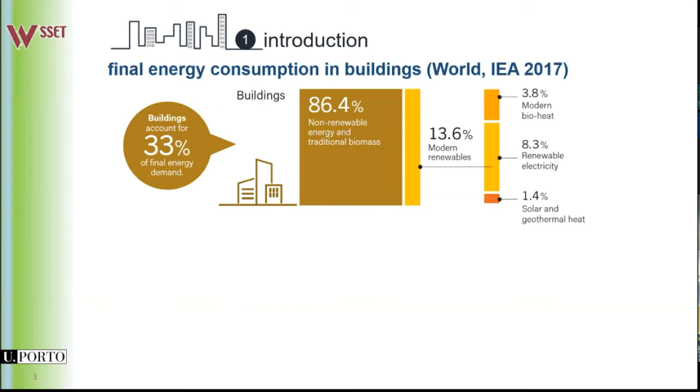As it is well known, buildings are responsible for about 33% of the final energy consumption in the world. And of those 33%, a very large portion is met by non-renewable and traditional non-renewable energy, like fossil fuels, and also traditional biomass. Only 13.6% are met by modern renewables, which include bioheat, renewable electricity, solar, and geothermal heat. We can discuss if traditional biomass may or may not be considered as a renewable source, but that is another question. Of course, part of traditional biomass is renewable, but not 100%.

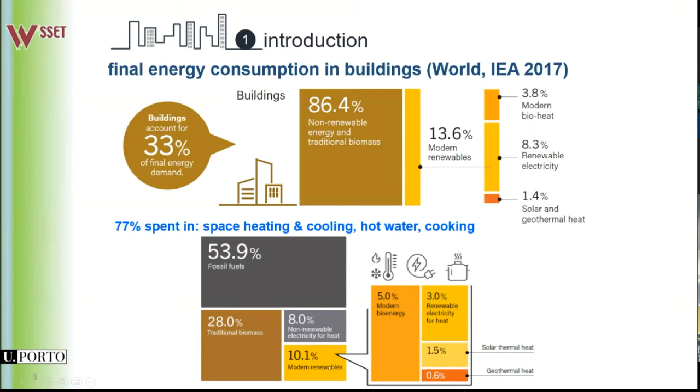Of all the energy spent in buildings, 77% is spent for heating. That means space heating and cooling, generating hot water, and cooking. And more than half of this is met by fossil fuels, 53.9%. Only 10% is met by renewables and modern renewables.

When speaking about energy savings and using the designation of zero energy buildings, we may ask this question: is zero energy possible? Well, there was a famous railway engineer in the UK, Brunel, who said that nothing is impossible when you are an engineer. So assuming we are engineers, what would be the strategy to follow to achieve zero energy in buildings?

The first approach is related to the reduction of energy needs. We can reduce the needs of energy by not spending so much, or as an extreme situation, by not having any people in the building. Of course, this is not an option because buildings are made for people. But if you remember, some of the first measures to lead to energy savings were related to changing set points, reducing the set point of ambient temperature when people were not in the buildings, and so on. So the first part of the strategy to achieve zero energy is to reduce the energy needs.

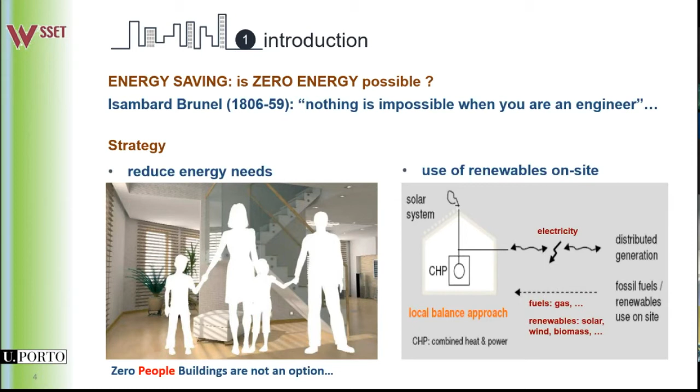Then we can also use renewable sources of energy on site. This means using solar energy systems, wind energy, biomass systems that are able to meet the demand of energy. We will look at the building as an energy system which exchanges energy fluxes with the surroundings. So it will receive energy from the outside, it will receive electricity from the grid, it will eventually deliver some electricity to the grid if we produce electricity on site, for instance with a solar PV system, and we will take into account all these energy fluxes to achieve a zero balance. I will talk in a few moments about this definition of zero balance.

So, looking again at the possibility of achieving zero energy, there are some studies that led to a conclusion that that is not possible in every building. There are a few questions, namely the available space to install solar energy systems, for instance. And this graph I'm presenting is showing, let me point out, this is the number of floors in the building, and this is the percentage of buildings that are able to meet the zero energy standard. And as you can see, if you have one story, it's much easier to achieve zero energy than if you have 3 or 4 stories, for instance. This is the result of a study made in the USA.

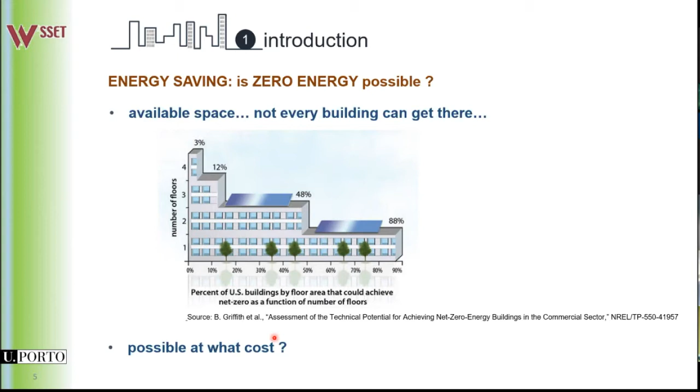Another issue, besides the available space, is the cost of obtaining zero energy. So it may be possible, but it may cost too much. And that is another issue I will try to address.

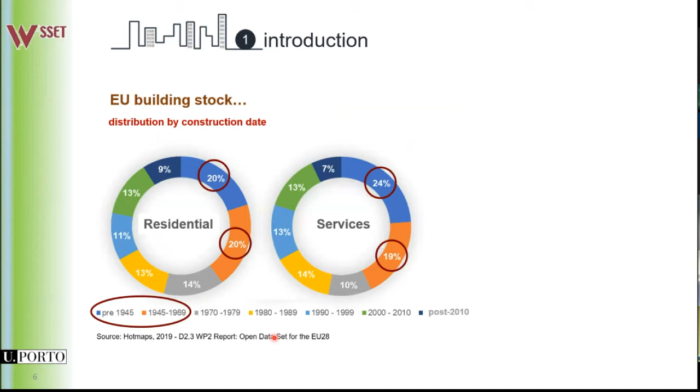Another important aspect is that if we look at the European Union building stock, we find that most of the buildings are quite old. In fact, a large part of them, either residential or services buildings, more than 40%, are more than 50 years old. And many of those buildings were built before energy regulations were in place. And this means that the standards are not meeting the zero energy requirements. So there is a huge potential for energy saving in those buildings if we look at the renovation of the buildings.

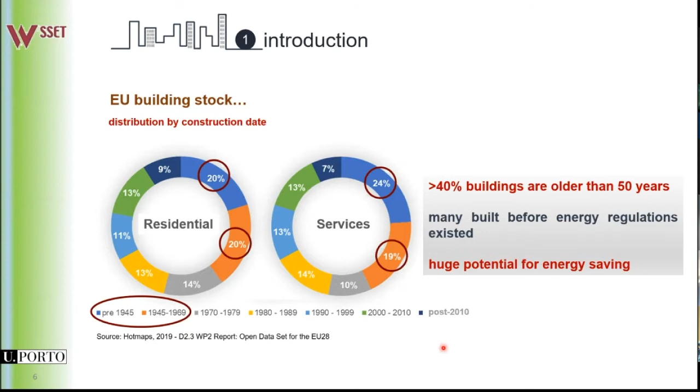Now looking a little bit at the regulations and definitions of zero energy buildings, there is a difference between a zero energy building and what we call NZEB, a nearly zero energy building. A zero energy building is seen as a net zero energy building. This means that if we make a balance between the energy exchanged with the outside, taking into account the energy we may produce in the building and the energy needs we actually consume, a net zero energy building has a zero energy balance over the period of one year. So energy needs are equal to the energy produced to satisfy those needs.

Another concept is nearly zero energy buildings, introduced recently in the last 10 years by the European Commission. This means we do not have a zero balance. In a nearly zero energy building, or NZEB, we have a consumption which is slightly higher than production. Of course, the term slightly is very vague. We do not know exactly what is slightly. It can be 1% higher or it can be 10% higher, and this is a question I will address.

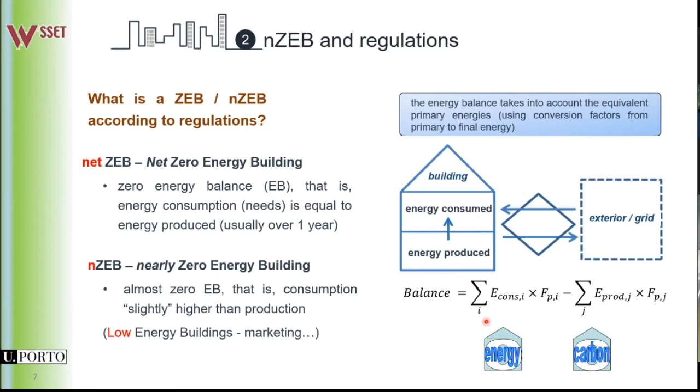To complicate the definitions a bit, there is also the definition of zero carbon buildings, or nearly zero carbon buildings. I will concentrate in this presentation on zero energy, not zero carbon, but a similar approach could be followed. Zero carbon is used in many regulations, for instance in the UK for residential buildings and in other countries, but the European Union is focusing on zero energy rather than zero carbon.

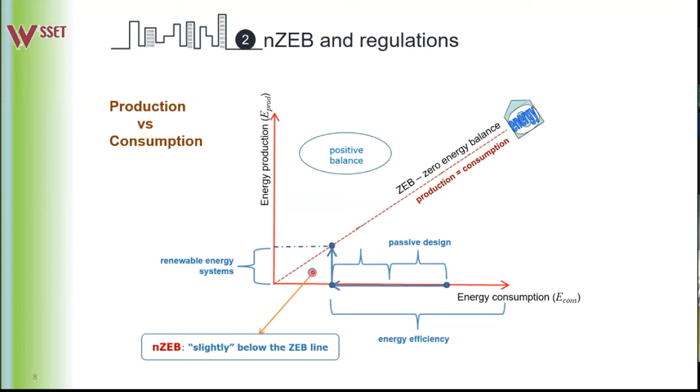Looking now at the existing regulations, in particular the European Union regulations, their evolution and the present situation. In the beginning of the century, we started with the first directive, called the Energy Performance of Buildings Directive, in 2002, which established the process of energy certification in buildings. After that, the member countries all applied this directive with different variations, and we have had an energy certification process going on as usual since then.

Let me just drink a little bit.

We started hearing and talking about zero energy buildings back in 2010 with the recast of this directive, often called EPBD2, where the objective was to achieve, in a number of years, the zero energy building standard, or a situation close to zero energy. Nearly zero energy was then defined.

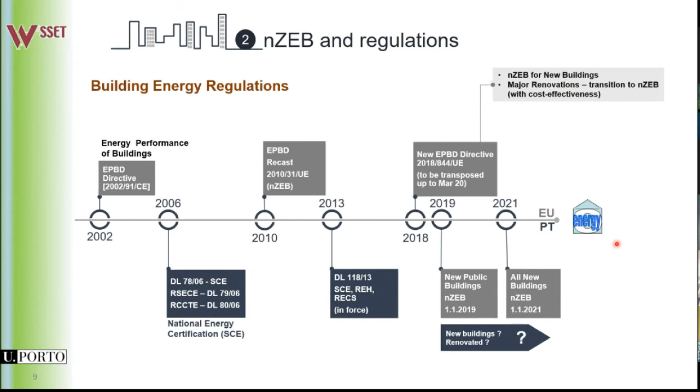The situation now is that most countries, as I will show you, don't yet have limits defined for NZEB buildings.

Most buildings will not be affected so soon by the regulations, because it's not clear if renovations will or will not be included in the country regulations, namely in the EU. And as more than 90% of the building stock will be renovated and not new, the effectiveness of the regulation will not be very high, except if renovations will be included.

So the NZEB levels have not yet been defined for many countries, neither for new buildings nor for renovated buildings.

Looking at values for NZEB buildings, values of energy consumption, it is important to analyze the levels of energy consumption, what we may consider as near zero in renovations, taking into account the climatic zones where the buildings are and the type of building. So I will try to address a bit of those issues in the remaining of my presentation.

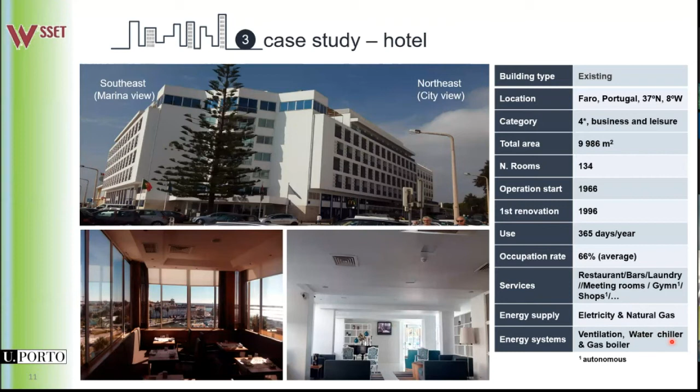The energy systems include ventilation, a set of gas boilers that produce hot water used both for sanitary purposes and for space heating in winter. And there is an electrical water chiller that produces cold water to cool the space during the summer period.

This hotel was subjected to an energy audit during a period of one year. Through the energy audit, we identified an index of energy efficiency equal to 214 kilowatt-hours of primary energy spent per square meter per year.

This is the index used in the regulation to establish the energy consumption of the building and to compare with zero energy levels or nearly zero energy levels.

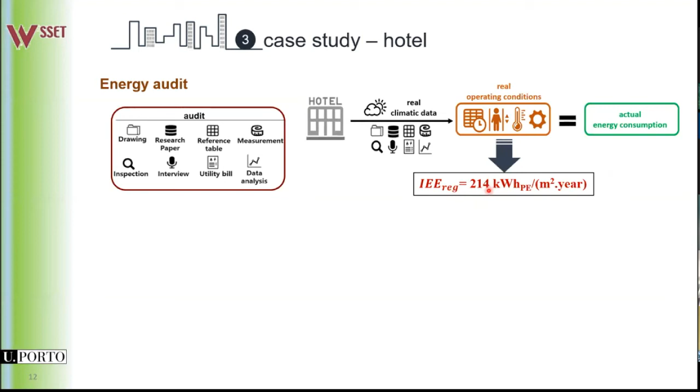This value takes into account only the regulated consumptions. What are regulated consumptions? These are the ones that are taken into account in the regulations.

There are some consumptions that don't have limits in the regulations, like, for instance, the energy spent in kitchens or in laundries. They are not regulated by the standards.

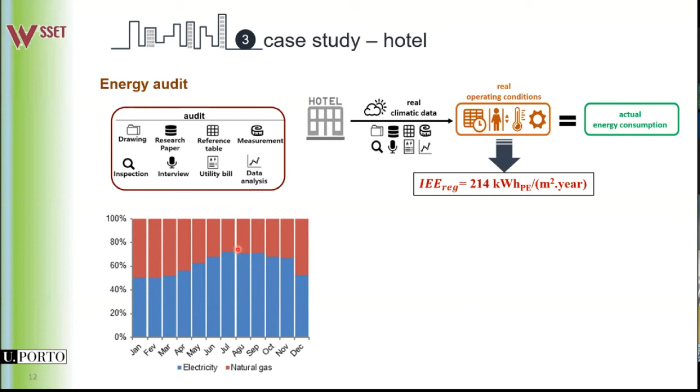This graph shows the consumption of electricity and natural gas in the hotel throughout the year. As we see, in summer periods we have a higher consumption of electricity because we use the electrical chillers to produce cooling.

There is another graph which shows the evolution of the consumption of electricity, which more or less follows the increase in temperature during the summer period.

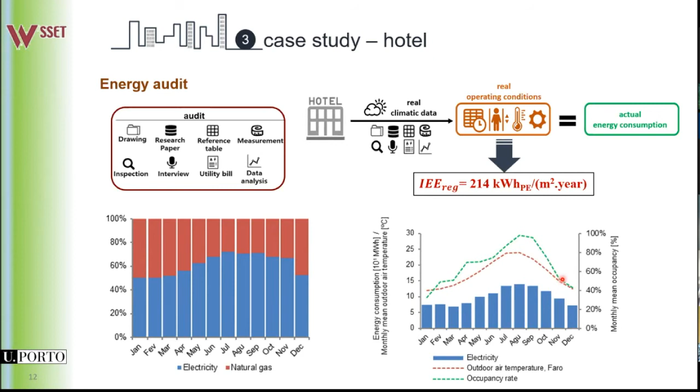What we developed after the audit was a simulation model using a well-known computer program, Energy Plus, and an interface called Design Builder, which allows describing the building in terms of geometry, operating conditions, construction characteristics, and energy systems.

This model was calibrated by inserting the real schedules of use of the building, lighting, occupation, and so on. So we were able to produce realistic model results.

With this model, we were able to identify the different uses of energy in the hotel, and you have the different shares of energy use in the building.

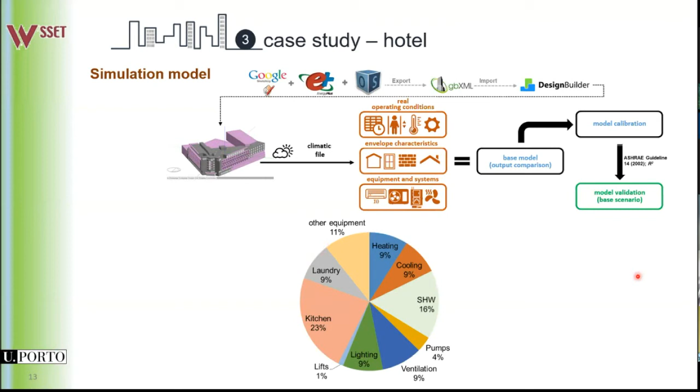Heating and cooling are responsible for 18% of the consumption, and only 57% of the energy consumption corresponds to regulated consumptions. So you have, for instance, the kitchen and laundry and other equipment which are not regulated consumptions.

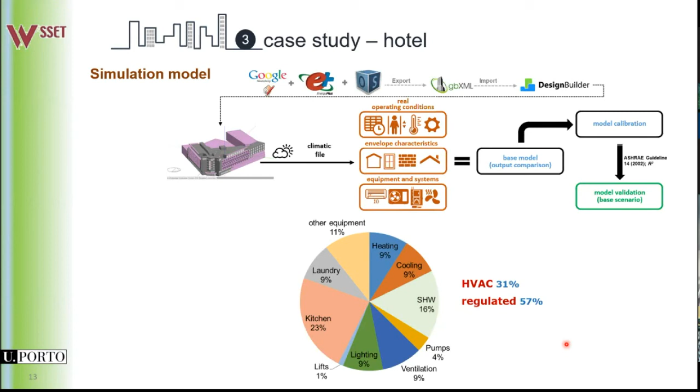The regulated consumptions are related to space heating and cooling, sanitary hot water, ventilation, and lighting. So these are the ones I will talk about in the coming figures.

If we compare the model results with the audit, the real consumption results, we obtained a fair agreement. So I will pass this slide on.

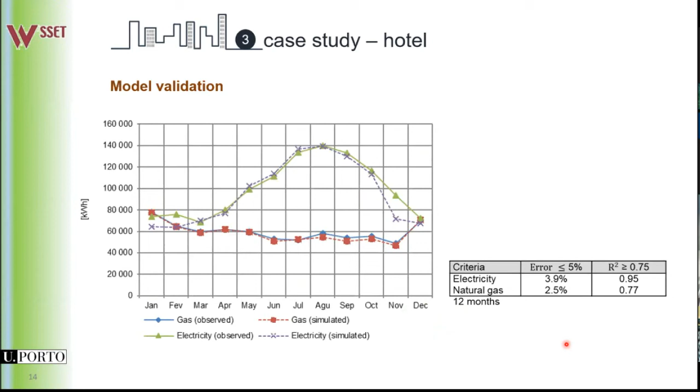The next step of the case study was to develop several parametric analyses, analyzing with the model the influence of changing the conditions of the building in a future renovation. So we consider different energy efficiency measures and eventually the use of renewable systems.

I will not go into the details of this table. You will have access to this presentation and other information I will show you later on.

I'm going to divide these measures into three groups. The first group...

This corresponds to replacing lighting systems with more efficient LED lighting, improving ventilation by using variable volume fans instead of conventional constant speed fans, changing set point temperatures from 22 in winter and 24 in summer to 20 in winter and 25 in summer, and limiting water consumption in the rooms by reducing the flow of water in the taps. So this is the first set of measures.

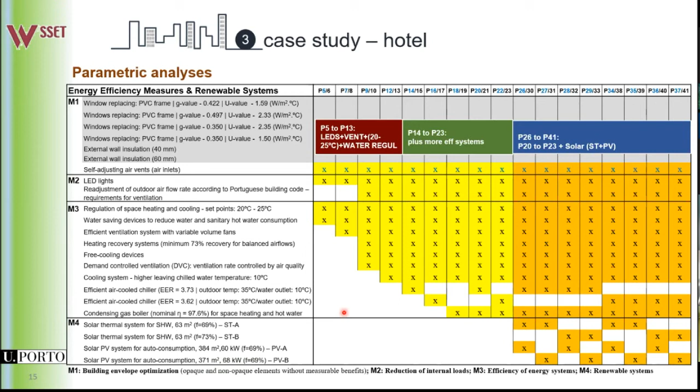If we adopt the first set of measures, we will achieve lower values. For instance, if we regulate the water consumption only, imposing a maximum of 34 liters per person in each room per day, we achieve a significantly lower value of about 200 for the primary energy consumption per year, per square meter.

If we adopt the full first set of measures, including the reduction in water consumption, the change to LED lighting, ventilation regulation, and changes in set points, we will reach lower values of energy consumption, up to 160 kilowatt hours per square meter per year.

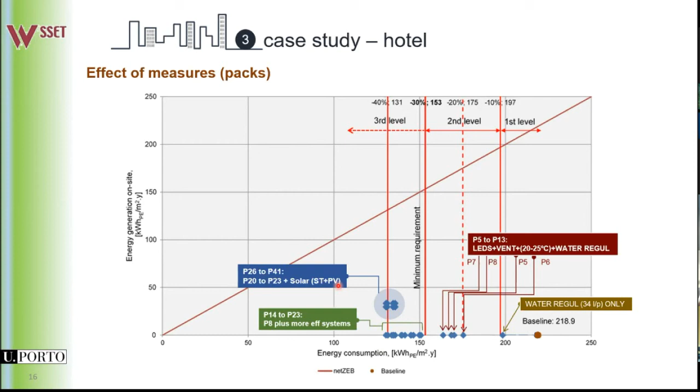We also made a study of the economic results of those measures adopted for the renovation of the hotel, and we calculated the life cycle cost for a period of 20 years of those renovation measures. We concluded that for the different sets of measures, the different packages, there is not a big difference in the life cycle cost.

If we keep the same situation with no renovation, the life cycle cost is much higher than the cost of any of the renovation measures. In particular, the optimum results are obtained for measures that do not include the change in energy equipment or the use of renewables. The optimum is obtained only with changes in lighting, ventilation, set points, and water consumption.

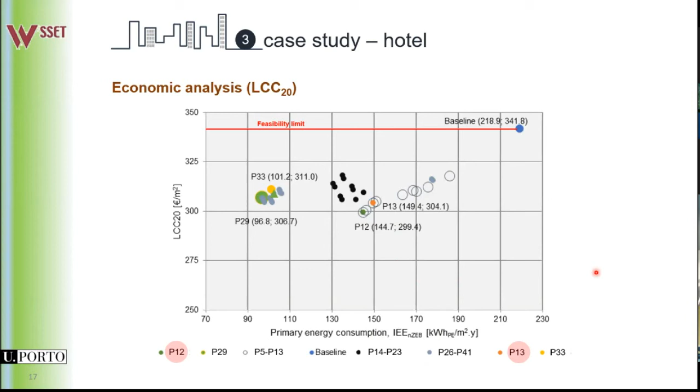We also made an analysis of the return on investment by calculating the payback period of the renovations we were considering. In this case, we obtained variable payback periods. The best values are between about 2 and 4 years.

For the measures that do not include changes in equipment or installation of renewable systems, the payback is short. If we install renewables, we will have payback periods of about 10 to 11 years, which correspond to those points.

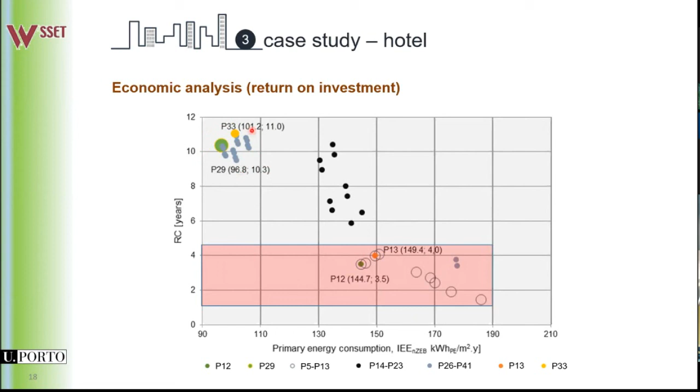So further studies that we need to make to establish nearly zero energy values have to consider the influence of climate. We made a study which compares the same hotel building, exactly the same building with exactly the same occupation patterns, located in three different climates: the base situation in Faro, Portugal, another in London, UK, and another in Athens, Greece.

By comparing the results, we have an idea about the influence of climate, and of course, we expect higher consumption in London. The final energy consumption in the same hotel would be about twice in London compared to Portugal, and in particular we would have a very high share for heating, about 50% of total final energy consumption. In Greece, we have a higher consumption than in Portugal, with a higher weight for space cooling and space heating, which is a result of the climate.

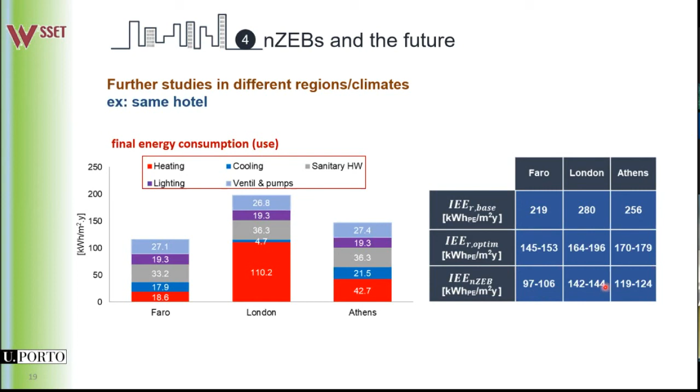If we look at the energy consumption indexes, the base values for the hotel without renovation are 219 kilowatt hours of primary energy per square meter per year, compared to 280 in London and 256 in Athens. If we look at nearly zero energy values, using the renovation measures we defined, like improving efficiency and installing solar energy systems, we would achieve values about 50% of the base values: around 100 for Portugal, 140 for London, and 120 for Athens.

Other aspects we need to address in the future are to establish values. The values we obtained in this case study may be considered typical values for limits that can be imposed in regulations for Portugal, for 4 and 5-star hotels eventually. But we also need to establish values for other types of buildings, for residential buildings, for housing, for commercial buildings, and so on.

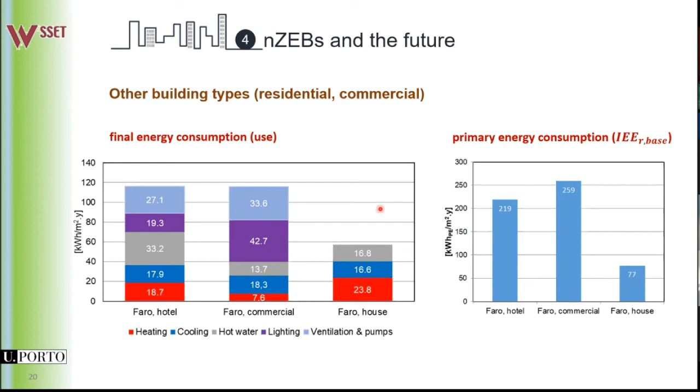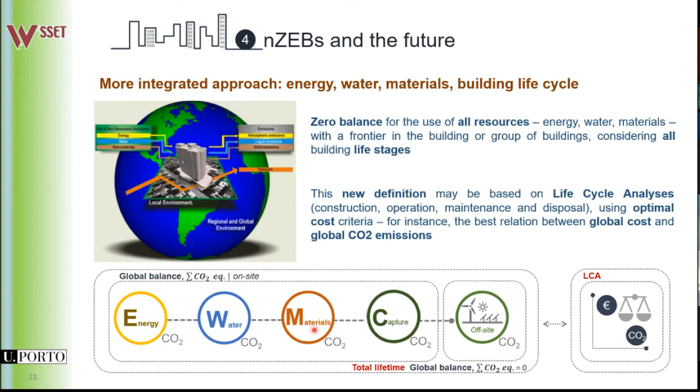Of course, many things are still to be said. In the future, we have to extend the analysis to include other aspects of energy and other uses of resources in the building, in particular the use of water and materials, and consider the life cycle of the building, not only its operation as we did in the example shown. We need to take into account a complete life cycle analysis, including the total cost and total emissions, including not only operation but also construction and disposal of the building.

So, as main conclusions, looking at NZEB or nearly zero energy buildings, the regulations are late in many countries. In the EU, most member countries have no standards, no definitions for the values to be taken into account. The regulations will have a limited impact, except if they include renovations and the existing building stock, which has not been done until now. Realistic NZEB values may be obtained with the methodology I showed for the case study, combining energy audits and building simulation.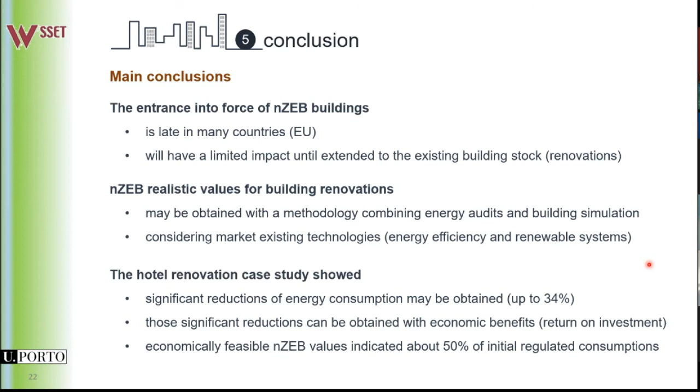Since the regulation establishes the need to ensure economic feasibility in nearly zero energy values for renovations, we should consider market-existing technologies when replacing energy systems. The case study showed we can achieve significant reductions of energy consumption, up to 34% in final energy and primary energy consumption. Those reductions may be obtained with economic benefits, so we have a positive return on investment and positive life cycle costs. Economically feasible values indicated about 50% of the initial regulated consumptions, and that was valid for the 3 climates we analyzed.

Okay, so we have achieved something, but we are still trying, and we are still far from zero energy. In the future, we might eventually reach very nearly zero energy, and after that we may think about the actual zero. Thank you so much for listening.